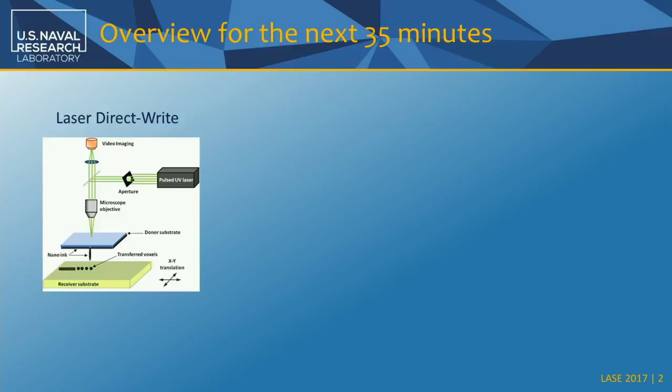More recently, what we have discovered is that we can use the same principle, but to transfer complex fluids. When we work with fluids, the advantage is that we don't have to heat them up to the point that they melt. Well, of course, they vaporize. So we avoid that, which is better because we can actually transfer materials that will be sensitive to a change in phase, for example.

So what I'd like to show you is how we can use this application, this technique, to print interconnects and print devices. And here's an example of some of the things I'm going to show you today, with the idea that we want to produce hybrid electronics.

Now, the word hybrid here, what it means is that we want to take the best of both worlds. The idea of printing electronics is not new, and there's been huge efforts, very successful, using, for example, organic semiconductors to print things like displays, transistors for displays. But there, what you're trying to do is build a transistor from scratch.

The approach used in hybrid electronics is, let's use CMOS or other already fabricated circuits, integrate them into a substrate, interconnect them, and now we can have effectively a part that is functional.

And so I show here an LED, in this case it's a bare die, and I'll be using that terminology during my talk, and that is a chip that is not packaged. You can see here the entire LED glowing. You see the scale here, this is about a quarter of a millimeter. So these are very small devices.

But these are the devices that you see, for example, in your phone or your computer that light up. And you see the connections that we have printed. Both the LED and the interconnects were transferred with this laser-forward transfer process, or laser DirectWrite.

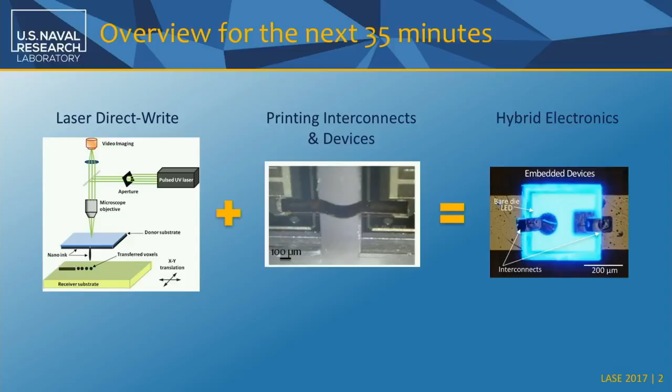So the goal is very simple. Can we actually go from a design to a printed part, but it's not a printed part that is faithful in the structural sense, but is faithful in the functional sense. So we have a design for a circuit, can we print it, and does that circuit then work?

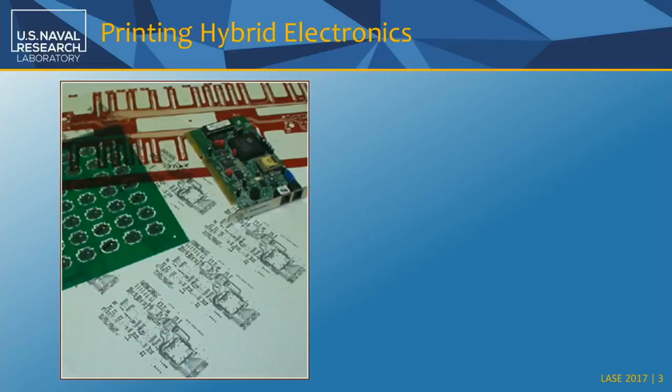And so what we need to do that is we need to have a substrate, we need to wire up, we need to place the devices, and to connect between the wiring and the devices, we're going to need what I call these interconnects. This can be done in steps, and if you do it right, you can actually end with a functional circuit.

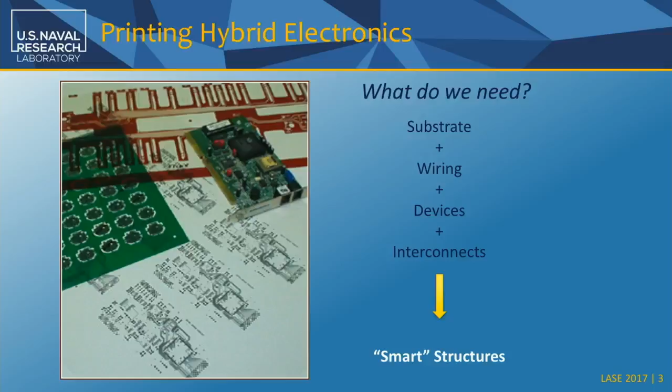Now, the Navy is very interested in additive technologies, and these DirectWrite techniques that I'm presenting today are also a subset of additive manufacturing. One thing that's of interest for the Navy is that additive techniques will help on the supply chain. That's a huge problem when you deploy and send a ship overseas, something breaks down, and now you have to send a part from the US, for example, to Japan, if it's based there. If you could do that in situ, meaning you had an additive manufacturing facility, that would allow you, instead of sending the part, to just send the data to make that part.

There are other applications the Navy envisions for additive manufacturing: energetics, medical care, and sustaining expeditionary forces.

But one area that we see ourselves fitting very well is on-demand systems. By that, I mean the ability to do embedded systems with sensors and electronics that can be set up for a specific mission on theater. So this is where we see ourselves playing.

If you want to learn more about this vision for additive manufacturing, the program manager from the Office of Naval Research, Dr. Jennifer Wolk, will be giving a presentation tomorrow afternoon on laser 3D manufacturing. I encourage you to attend to learn more about what the Navy is trying to do.

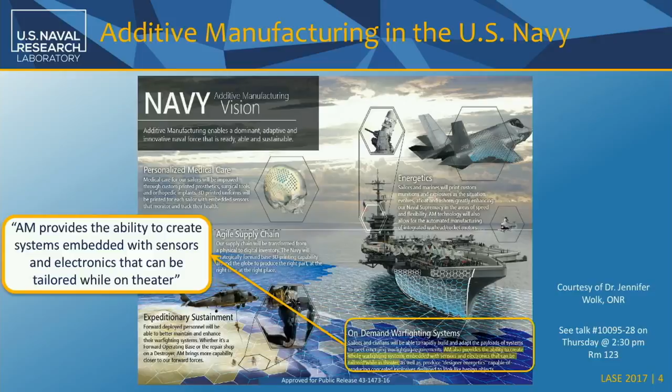So under the umbrella of printing electronics, embedded electronics, that's what we've been exploring. What we're doing is not unique. We heard this morning at the forum on industry applications about the manufacturing innovation institutes that have opened up in the past few years. The most familiar one to everybody is America Makes, the institute set up to do 3D additive manufacturing.

But there's a new one some of you may not be familiar with called NextFlex. This institute just opened up about a year ago. It's located on the West Coast, in Silicon Valley, funded by DoD, as a public-private partnership. The idea is to bring in industry, academia, and government together to develop these advanced manufacturing techniques.

This particular institute focuses on printing hybrid electronics. So again, we find ourselves working in an area that's attracting a lot of attention. The mission for NextFlex is to develop different techniques, not just laser-based techniques, but also roll-to-roll and imprinting techniques, with an emphasis on DoD applications.

Here I list a few examples, and I encourage you to check out the NextFlex website. Just search NextFlex on the web and you'll find the site. They are actually requesting white papers and proposals, looking for submissions from both academia and industry.

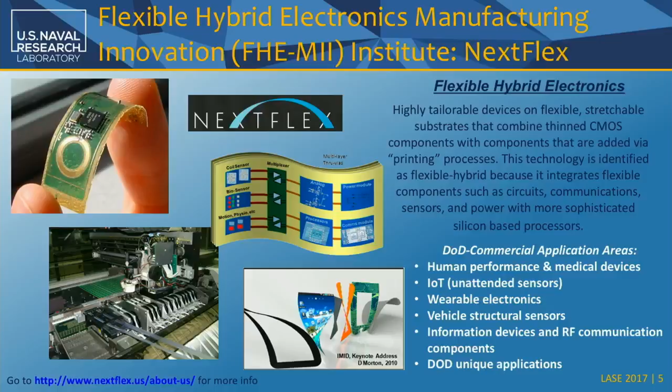Under that umbrella, we've been working at NRL on these ideas of putting down electronics for quite a few years now. I went back into one of my archive drives to get the old logo from a program that was started by DARPA back in the 2000s.

Because it's DARPA, they always like a nice acronym, so they came up with MICE, for Mesoscopic Integrated Conformal Electronics. This was a very interesting program because back then there were some ideas on 3D printing—stereolithography was available, also powder bed systems—but nobody had thought about doing printing for electronics applications.

What DARPA wanted to develop with this program was the ability to print an entire circuit. Originally, the goal was to print a GPS receiver, and under that program there were several teams working—we were one of them.

Back then, we showed that we could use the LIFT technique, laser-induced forward transfer, to print different types of devices, as I show here, containing different types of materials. Some of this work is very primitive, very early on, but it showed the potential of a laser technique to do both additive and subtractive manufacturing.

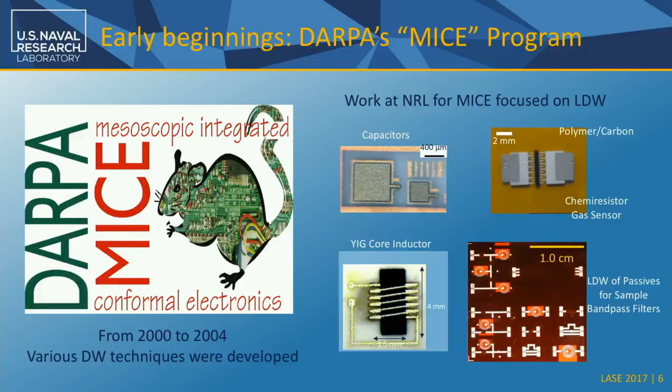There are other techniques that do this very well, and I want to highlight micropen and inkjet, because these techniques share the property that they use materials in fluid form. They print either low viscosity inks, as in inkjet, or high viscosity paste, as in micropen.

These techniques are well established and are actually used by different groups and companies for electronics. For example, inkjetting has been used to print electrodes for large-scale photovoltaics and solar cells. But the key is that with both techniques, you have to be careful about the material you put on the nozzle or dispensing head, because you can clog or block it, and you also have to worry about the fluid's viscosity being right for inkjetting or micropen.

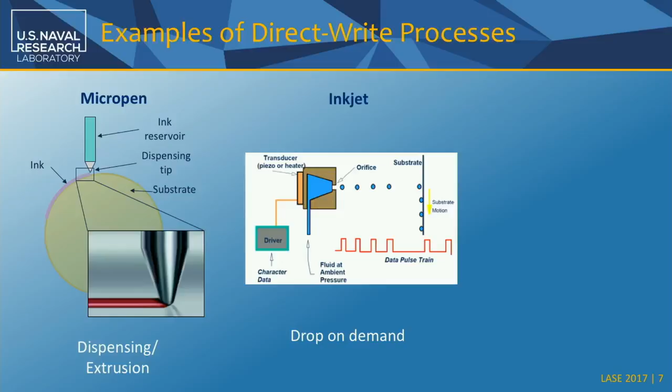When we use the Laser Forward Transfer technique, the laser DirectWrite technique I referred to, the nature of the material is not that critical. We can make a paste of anything we want, or a fluid of anything we can mix.

Sometimes it feels like we're painting - we take powders, mix them in a fluid, try to make something uniform, spread it on a donor substrate, and transfer it with a laser.

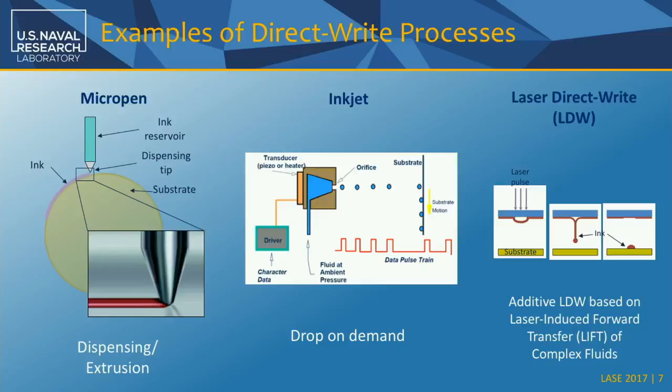This mechanism shows how the ejection works - there's a jet that forms for low viscosity inks, which leads to a drop. That droplet is what we collect, and as we repeat it, we form patterns. We call this droplet our voxel of material - our single unit of printing - and we can actually vary that.

Through the years, we've shown that with laser DirectWrite, we can do both addition of material and removal of material. That, in my opinion, gives these laser-based techniques an edge, because you have the same tool and setup letting you do two complementary things - I like to think of it as writing and erasing.

So if you make a mistake, you can come back and trim your pattern. If you need to drill a via to connect between two levels, you can do that with the laser. If you need to make a pocket to put a device in for a hybrid electronic, you can do that as well.

Once you have that laser in place, all you need to do is adjust the intensity of the beam and your pulse, and you can go from a very gentle transfer - with no heating or compromising the material - to ablation, where you can do micromachining.

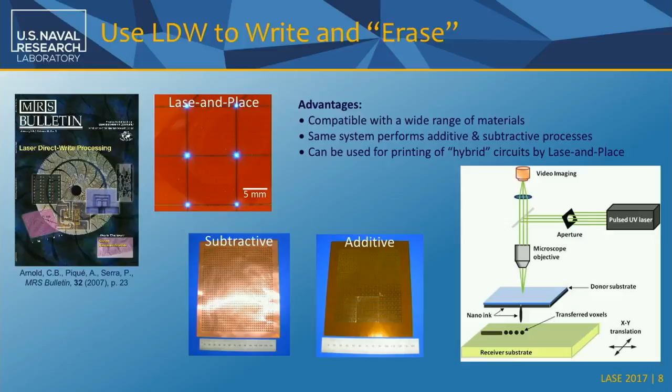Here's an example of one of our workstations. One thing you'll notice is that they're open, because we work with different types of parts. End users come to us wanting to print, for example, an antenna on a curved surface. Because of that, we designed a system where the optics are above, and the translation stages that let us register and locate points on a surface or 3D part are decoupled.

The other important thing is what we call our writing station. Here you see a galvo head - we can send the beam through galvo scan mirrors to scan and write at higher speeds, or send it through an objective set of lenses to get higher resolution. We can also mount other things on this platform that let us work at different heights, controlling the gap between our working surface and the print.

In this picture you don't see the laser, but we use solid-state, diode-pumped solid-state lasers. We usually work at 355 nanometers, with repetition rates ranging between a kilohertz and 10 kilohertz or so. We can go faster, but most of our work is for prototyping and research purposes, so that's sufficient.

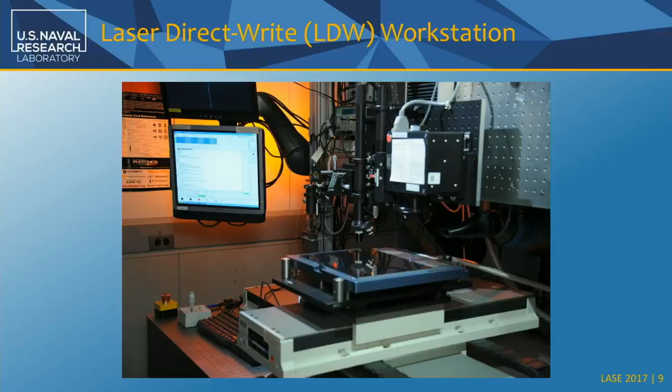So here's some examples of what we have printed through the years, and I'd like to draw your attention to the range of particle sizes. We can print suspensions that contain nanoparticles of material, and I say material because I want to show you during this presentation that this technique is compatible with a wide range of materials: metals, polymers, dielectrics.

In this case, we're printing nanoparticles of titanium dioxide for making what is called a Grätzel cell, or an electrochemical photocell, photodiode. But we can also print large particle sizes, which means we don't have to have anything prepared especially for the process. If we wanted to inkjet this, for example, that would be very difficult. In this case, these are actually both the anode, the carbon, and the lithium cobalt oxide cathode to make a stack structure for making a lithium ion battery. So these are the kinds of things that we can print.

And also polymers - this is a polymer loaded with carbon. Effectively it's a chemiresistor, as in the presence of a vapor, an organic vapor, it swells and the resistance changes.

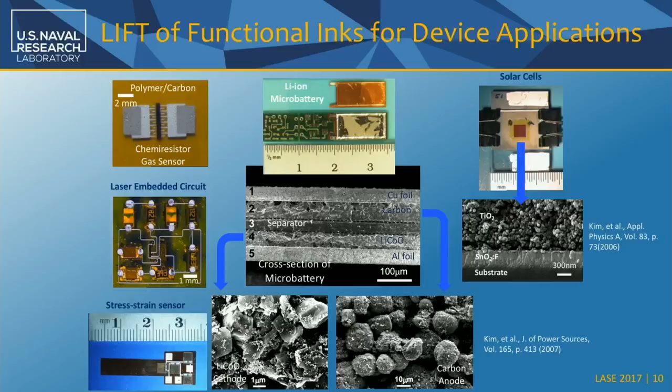So here is a cartoon, and this is not drawn to scale, but this is an easy way to visualize what happens when we fire a laser pulse. The laser is coming from above, and we have here an example of two types of fluids that we can have on our donor surface. The donor surface could just be a piece of glass, and we coat it with the material we want to transfer. This is usually a few microns in thickness, and with low viscosity, we form a drop. We form first a jet - that jet originates from the collapse of the bubble that forms when the laser heats up some of the solvent and vaporizes it, and this collapsing bubble leads to a jet that then forms a droplet.

But we have another regime where if we have a high viscosity paste - just to give you an idea, think about peanut butter. We have materials designed for screen printing, for example. And now, instead of having a bubble, we actually have more of a delamination of the material. Keep in mind the material here is still a paste - the laser hasn't dried that paste, the laser hasn't heated it up at all. It's just enough to shear the material away, and now we have a different type of transfer.

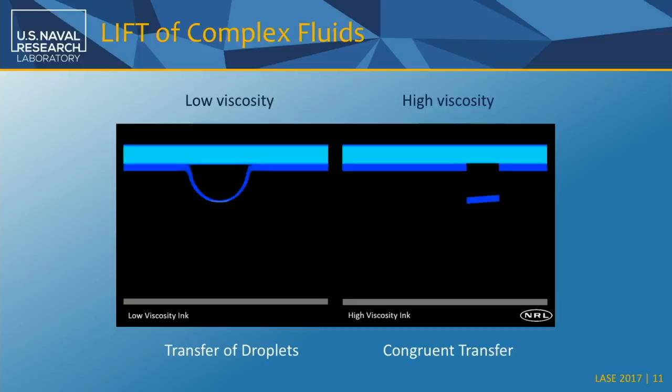So these are complementary because, as I said, this is not drawn to scale. The gap on which sometimes we need to transfer the high viscosity is going to be less. There's usually a gap between the receiving and the donor, of the order of 25 to 50 microns or so. Keep this in mind because you're going to see examples of what we can do, especially with a high viscosity transfer.

So again, here is just a representation, but now let's check what the transfers actually look like. We took two silver nano suspensions and transferred them onto a silicon substrate. I want you to pay attention to the apertures here - this is actually the laser intensity profile of the beam interacting with the donor's ink. Here we have a circular aperture, and here a square aperture. The intensities are pretty uniform - we blow up the beam to get a relatively uniform distribution. It's the same laser, the same conditions - the energy may be slightly different, but we're talking about a small percentage change.

Notice that when we transfer the low viscosity ink, the shape of the aperture doesn't play a role - we effectively get a disk on the transfer because remember, we created a droplet. So the way I like to think about this is we lost information. There was information on the pattern, on the spatial profile distribution of the laser, and when we work with low viscosity inks, we're not able to maintain that. That's what happens with inkjetting, for example - that's why the shape of the nozzle really doesn't play a role.

But when we go to high viscosity, now what we have is what we call a congruent transfer. In those cases, the shape of the laser pulse is actually maintained and reproduced on the transfer.

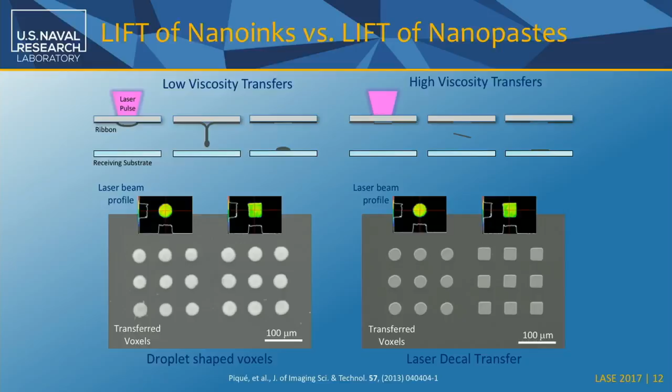This becomes very interesting because we're talking about a way now to transfer a voxel. So that's our three-dimensional printing unit, but that voxel can be shaped. We can actually adjust that.

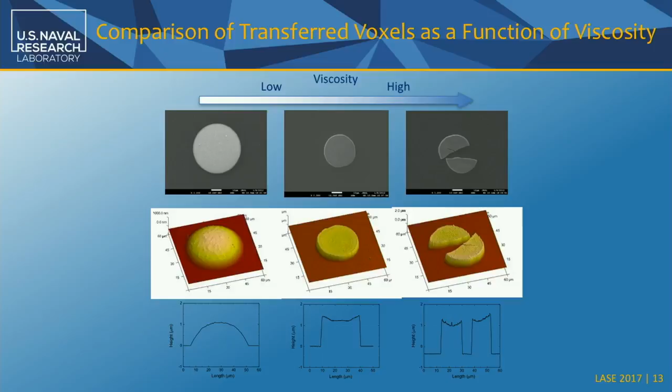On the other hand, when we have the right viscosity, we end up with almost what looks like a thin film. There are no masks, no patterning, no material removed, and we can get very precise patterns. Of course, if we remove too much solvent from that suspension, our transfer falls apart and breaks while it's released.

If you want to see that in action, a few years back we borrowed a high-speed camera, the kind used to photograph explosions, capturing many frames per second. In this case, we were operating at 100,000 frames per second. We took our donor substrate, took the laser and pulsed it, and removed the receiving substrate so we could see what happens with the ejected material.

These three videos are all done at the same frames per second, so the speed by which material transfers is the actual speed. If you see something moving very fast, it's actually moving at a faster rate than something moving slow. The scale here is 1 millimeter, to give you an idea of the size.

If I play these videos, you'll first notice the illumination from the laser pulse. The laser pulse is hitting right at this point, the interface between the donor substrate and the ink. You'll notice that we actually have three different regimes.

You can see that the dry transfer is completed while what we call a decal transfer, or the congruent transfer I mentioned before, is still going on. The videos are repeating so you can see it again.

Here is the jet formation and a drop just being ejected. This is what we imagine is happening, and these videos confirm it. These videos are available on the web. Sorry about that, let's try to get them started again.

There we go. Just to give you a scale, the speed at which this foil—and I say foil because we think of it that way, but it's actually not a solid, it's still a paste, so think of it like a cookie cutter that you are breaking up—this is about 300 microns, a third of a millimeter.

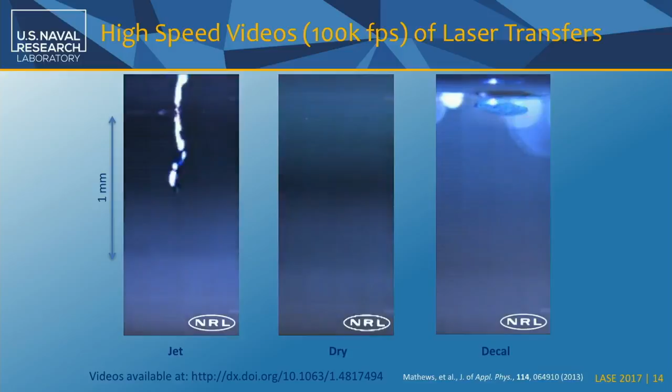They're the same size in all three cases, and this is moving at about a meter per second. That's how fast it's flying. Notice how it flaps and moves because it's actually flexible, and this is being done in air, so there is a drag involved.

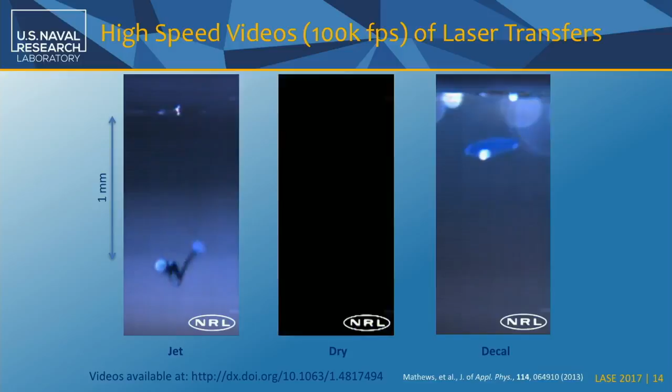So this is a very interesting regime that lets us transfer entire foils, if you will, with a predetermined shape. We just have to change the aperture, and now we can vary that.

Here are examples of things we have transferred using this congruent mode. We can change the aperture to do that, and we can also transfer larger or smaller.

This is on the order of a few microns. Notice the change in thickness too. As we make larger and larger transfers, we also have to increase the thickness; if not, we effectively rip that foil apart.

The other interesting thing is that we can change the coating on the donor substrate, making it thicker or thinner depending on what we're trying to do. These are three examples, each one a single laser pulse, and you can see we have a certain range of thicknesses we can print.

The resolution scale we can achieve is a few microns. We cannot go below that because, thinking about the perimeter and surface of these voxels, we're trying to shear this part from the ink, from the paste, and at some point the shear energy at the perimeter is so high that we end up damaging the voxel and the transfer.

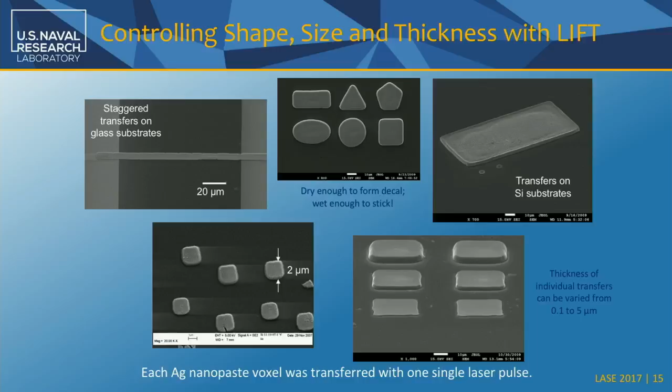We have to increase the energy to a point where we rip it apart. But because they're paste, when we print them, you can see the little details - that is individual voxels that were printed next to each other so we can make a continuous line. That's how we make the electrical connections.

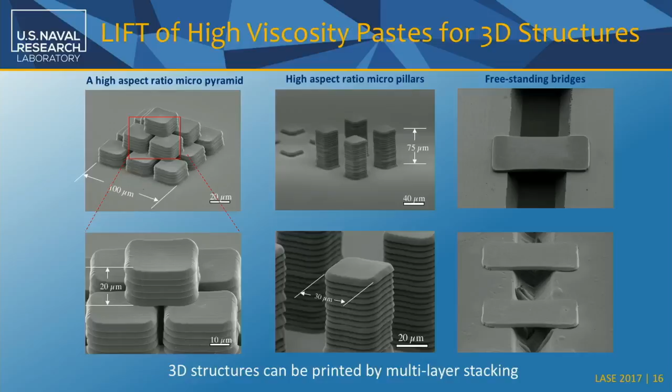We can also stack these things together, and we can also make freestanding structures. Notice how it was being released, and if we do that right, we can actually capture it and make bridges and also cantilevers.

One of the comments always made about these techniques is that they're serial in nature - how fast can you actually print? I want to thank Dr. Hennig for letting me use this slide from a project he worked on years back, where they designed a large throughput roll-to-roll printer process based on the Laser-Induced Forward Transfer.

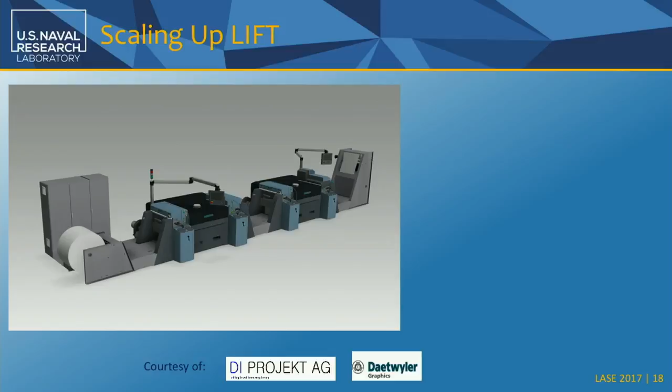The approach they use is laser back transfer instead of laser forward, but it's still a transfer-mediated process using lasers. In this case, you had a continuous roll with the ink that would be coated. The laser would heat up the metal backing - the ink being semi-transparent to the laser - and that creates a bubble, leading to the droplet being ejected. In close proximity, the paper would be moving constantly, and this laser would be scanning at a very high rate.

What is, in my opinion, impressive is the speeds they could achieve with this machine - they actually built it. Each one of these is a printing unit, and if I remember correctly, these are for the 4 colors. The laser system is in between, one here and one here. With the polygon, they could split it, so the duty cycle let them use both sides, and the efficiency was extremely high. With that, they could demonstrate it.

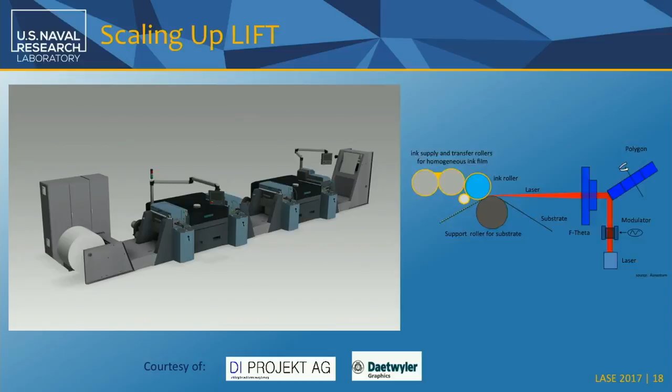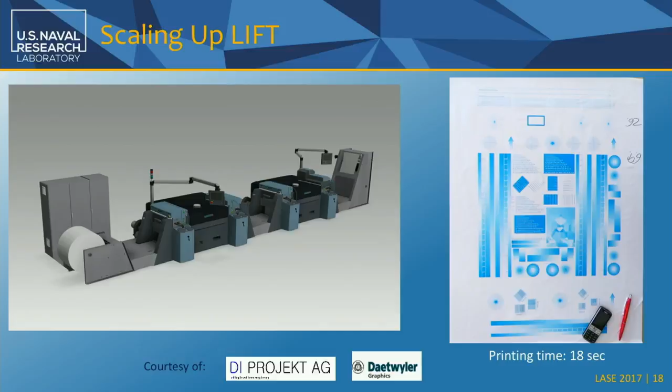These are printing artistic or graphic inks - this example is not an electronic ink. But you can see the size of this sheet; this test run took 18 seconds to print. I like showing this example because even though we're using a pulse process to print voxels, those pulses could be going at a very high rate, in this case in excess of 25 megahertz.

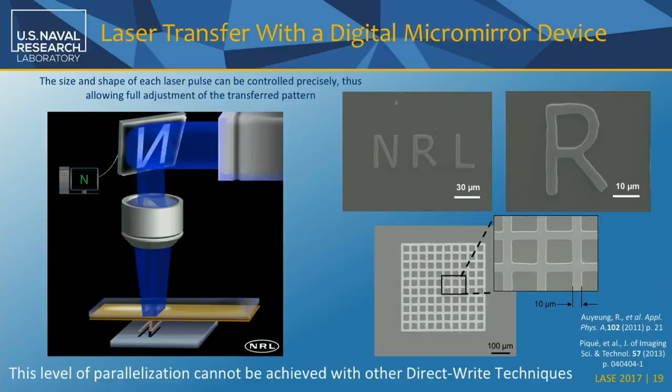Another interesting thing we can do, addressing whether these processes are scalable - speed is one way, another way is to dynamically change the shape of the voxel being printed. I showed you before that the congruent transfer lets us do that. Instead of using an aperture, which we've done in some of our systems, if we put a digital micromirror device - using, for example, one of the Texas Instruments DMDs - we can dynamically change the shape of the laser beam that impinges on the ink we're trying to transfer.

Dynamically means every pulse can be different, as shown in this cartoon example. Here's the actual product of that - this was done on silicon again, nice and flat so we can get good images. You can see that entire character, which could have been a pattern for an electronic interconnect, can be printed in a single laser pulse.

The interesting thing too is that we can do patterns that would be very difficult, or impossible, to do with a mask, like this grid. If we tried this with traditional printing techniques, say inkjet, we'd get an overlap between the two members of the grid. For an application where this needs to be uniform in thickness, that would be very difficult. With the laser transfer process, that is not an issue. So this is an example of how we can increase throughput with these techniques.

The last example of the capabilities of the laser transfer process applies to making a hybrid circuit. In this case, we want to transfer not an ink, but an entire device, which we think of as a brick. We want to launch bricks across a gap of 25 to 50 microns, capture them, and build a circuit that way.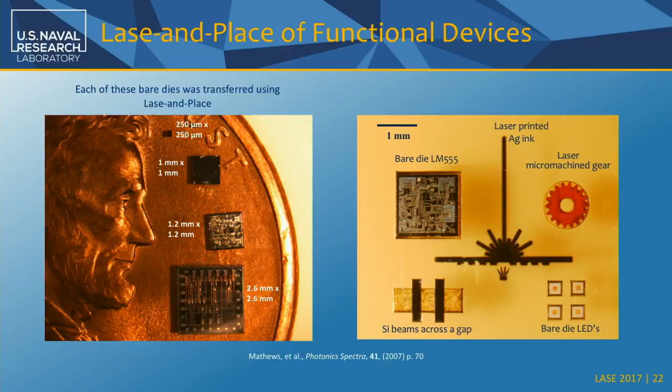But we can also transfer beams of silicon or pieces made by laser cutting. This is a gear that was laser cut out of polyimide. So the process is actually very flexible. All we need is a laser pulse that is about the size of the object, or the brick I referred to before, that we want to transfer.

So here are examples of what we can actually transfer, again the LEDs and the interconnects that we can print. And this is putting it all together, embedding these devices now on a curved surface. These are LEDs, then placing the connections and the wiring. That's how we can move to hybrid electronics.

So I think I'm out of time. Is that correct? Two minutes.

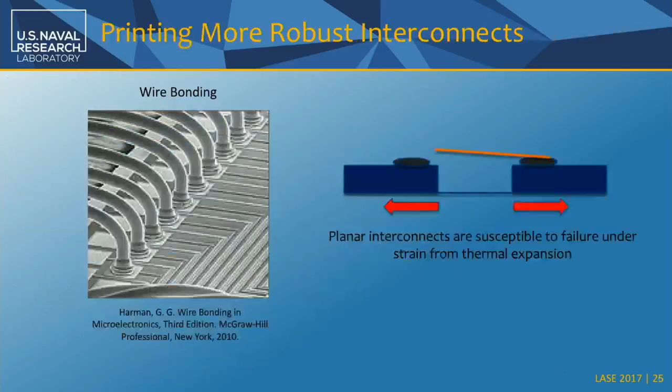So again, we can show interconnects as well, to take advantage of the freestanding structures that we can make. But the last thing I had here, and I'm going to move through this, was to show that we can also transfer metal foils when we need a high current application, if we need several amps in a circuit.

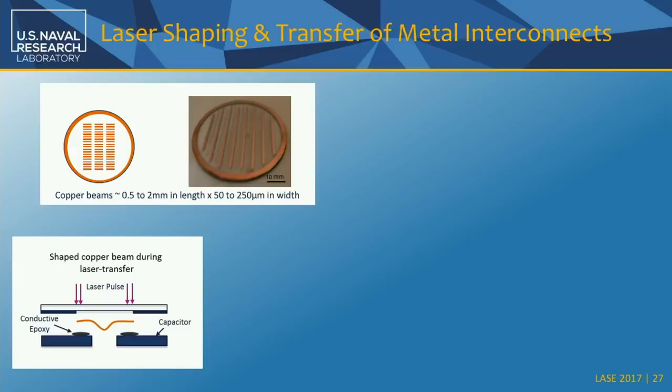One of the issues we have to worry about is we want to shape the foil so it can accommodate thermal mismatch strains on the part. We can do that also with the laser, so we can shape first and transfer later.

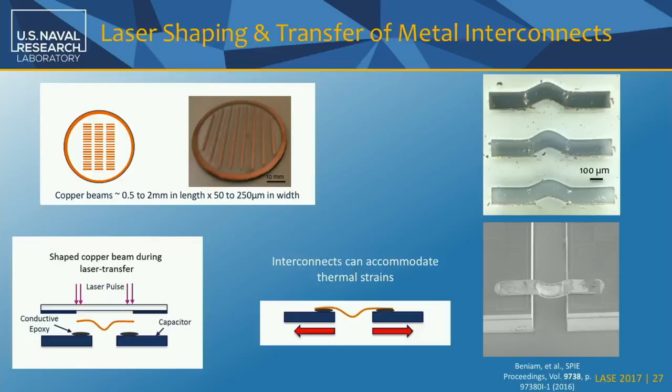Here are examples of some of these interconnects that are solid metal. This is no longer a paste that we use; we're actually using copper foil. And here's a circuit that we can actually demonstrate, making those interconnects.

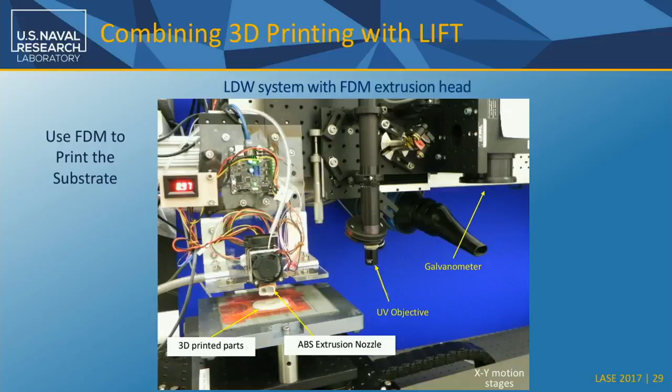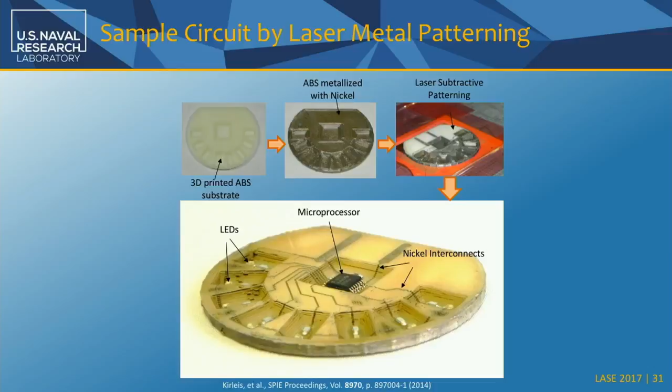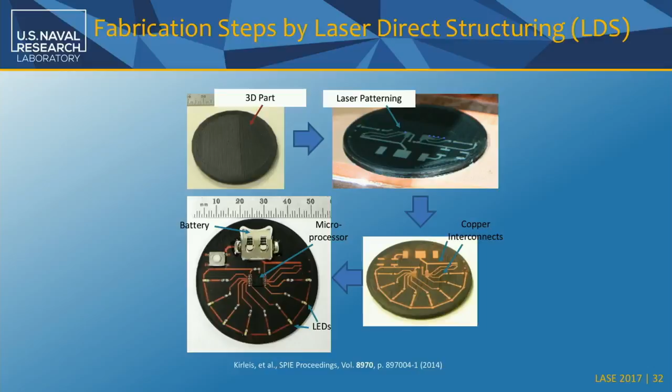The last thing is we can combine the laser transfer with additive manufacturing, in this case fused deposition modeling. In the LDW station that we have, we can add an extrusion head, design a part, fabricate it, and put the devices in. In this case, we did the interconnects by plating first and laser removing. But in another case, we use laser direct structuring, where the resin we print actually has metal particles that you can expose with the laser, and then you can electroplate and add your circuits.

So to finish, I want to leave you with some last thoughts. The advantage of laser DirectWrite is that we have both additive and subtractive processes. We don't have to worry about nozzles, and the materials have huge flexibility, letting us put in devices.

With LDW, what we can do is things like congruent transfer to print complex fluids. We combine it with a DMD and have dynamic adjustment on the voxel, fabricate freestanding structures for interconnects, and put entire devices in place, integrating with 3D printing.

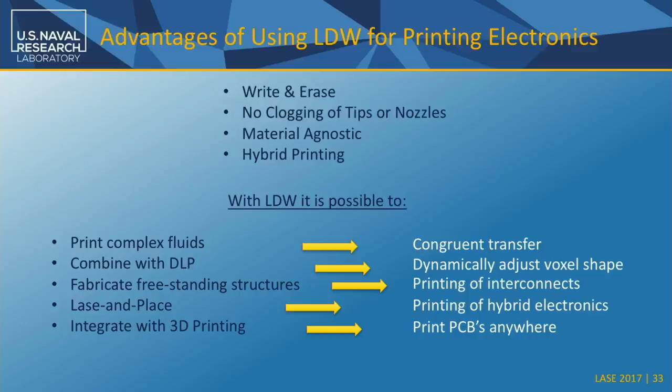And with that, I thank you for your patience, and I'll leave you with this last slide of some examples, and I'll be happy to answer any questions. Thank you.